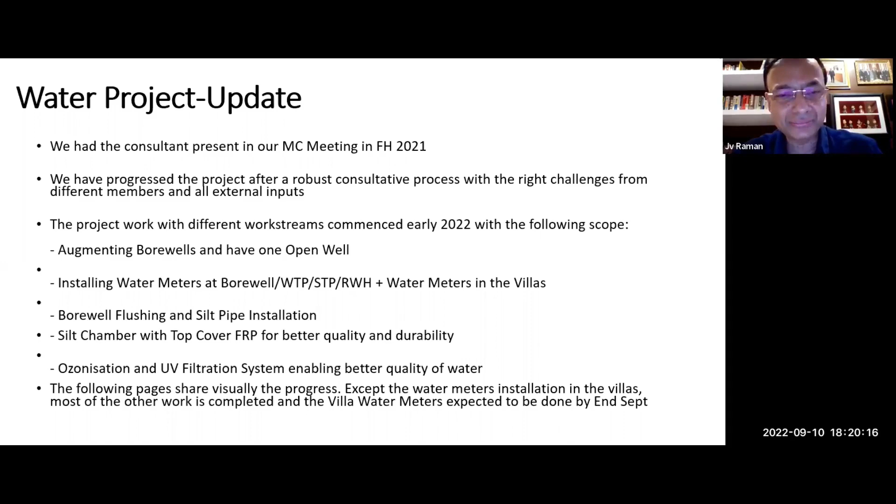The next chart. The first thing he mentioned is that North Karnataka is a water deficient table, the water table is pretty poor. We have 3 borewells dug below 1,000 feet, and he said there's no point going for a 4th well because there's also going to be legislation banning borewells in North Karnataka, or rather North Bangalore.

So given there's so little water, he suggested going into open well digging. We started off with one well, and remarkably at about 50 feet we got water. That's a remarkable thing we started off, we said let's experiment, there's no harm trying something out. Now we want to put in 2 more wells. I believe we'll get at least 8 to 10,000 liters. While it's still early days, we're working on how to improve supply to more like 8 to 10,000 liters from the open well. So this is the first thing we did on augmenting the supply.

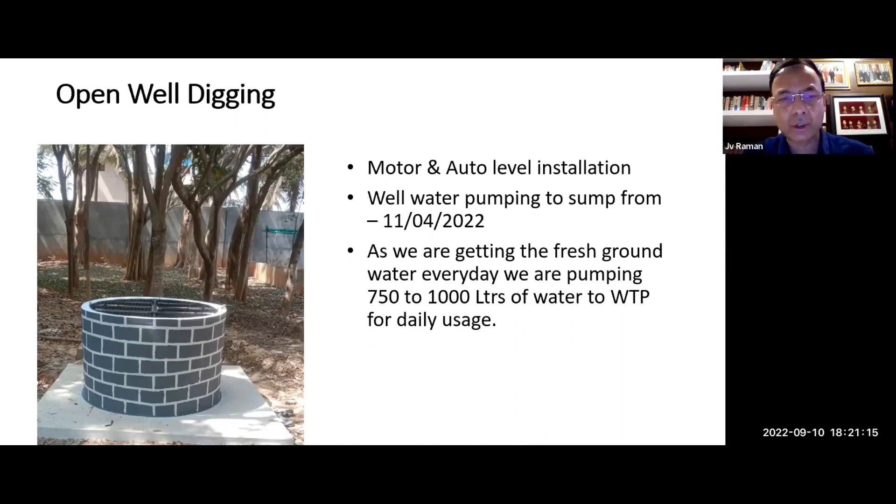The next chart. This is what we did with the V-wire injection well. I learned a lot talking to Vijay on this, because we have a borewell, and this was a new technology or system which enables better management of the groundwater, even during summer months, to manage the water table better. This V-wire injection has been done in the existing borewells, which is fantastic, because we're now able to consistently get close to 100,000 liters pumped out from each of these borewells. The real acid test will come during next year's summer, when we believe the water table will be augmented.

Now, thanks to the copious rains we've had this year, we've completely stopped using the borewells. I said let the water table continue to rise, and we don't touch that. We're using everything from the rainwater tank, because currently at the rate of water inlet we're getting, 1.5 crore liters gets filled up every 3 days, so there's no need to even touch the borewells. This has been done for all 3 borewells, with 3 injection wells created nearby the existing borewells. That's another thing we did to augment the supply.

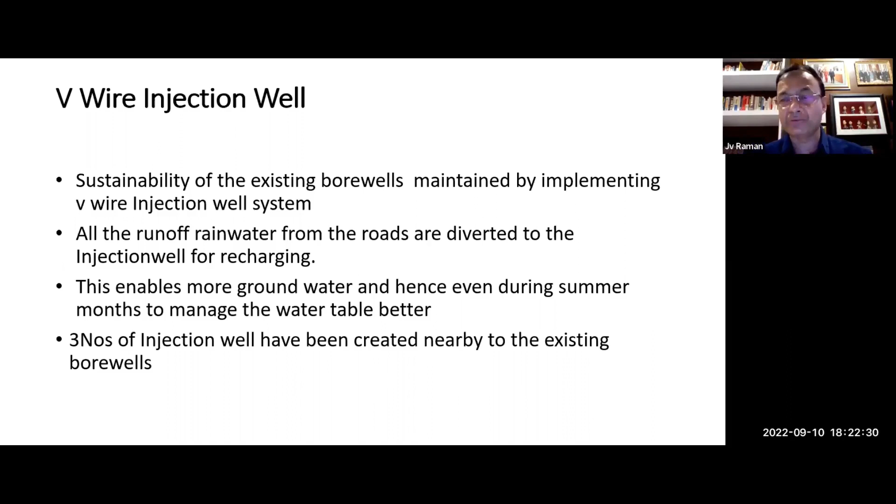The next chart. These are some of the pictures you can see. They worked around it to do it in a proper and nice manner, and completed the job, because it had to be finished in a way that doesn't spoil the topography of the land there. So these are some pictures. The next chart.

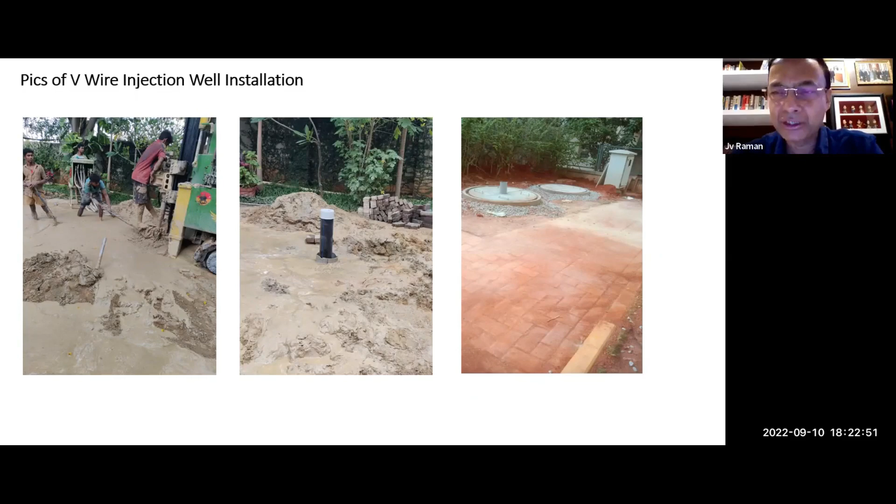This is the silt pipe installation to the bore well, one of the things done near Villa 31. We started off on the 25th of March this year on water pumping and rejuvenation of the existing bore well, which was not in use because the water table had gone down.

Thanks to this, we started using it again, which shows that the system works. People were very happy that a bore well which was not functional has been brought back to function. Next chart.

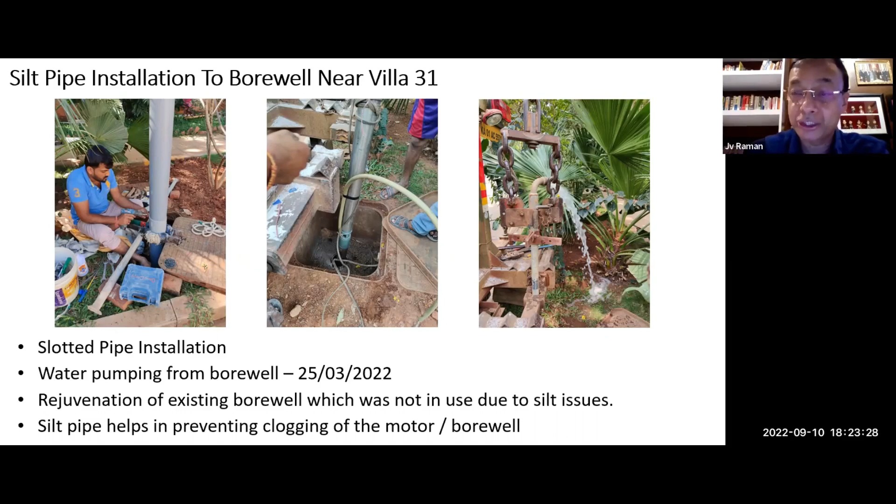This is what I mentioned about the silt chamber design. Because of the nature of the land here, with 17,000 trees planted, all more than 10 years old, there's a lot of leaves, particularly during the autumn time. So he studied the whole thing.

Two things were done. One, fiber reinforced plastic was placed as the top cover, which is going to be weatherproof for the coming decades. Two, to ensure that any silt or leaf formation does not go into the drainage system, he designed it so it does not get sucked in. That was the second recommendation from Vijay which was implemented.

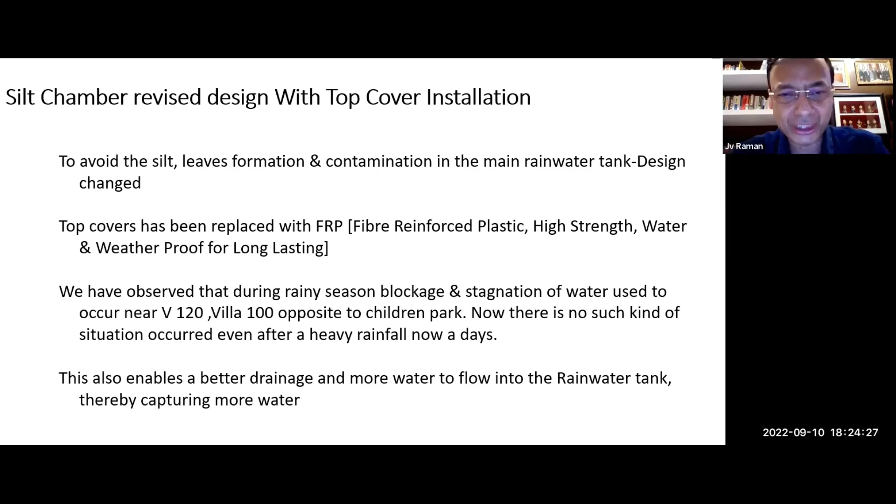The next chart shows some pictures. You can see the FRP and the existing silt chambers. We deepened them and took the pipe to the top, creating a siphoning effect, so that leaves, dust and debris settle, and only water rises and comes through. There was also a covering on the pipe.

We put a grating on the pipe. Earlier, because the rainwater harvesting tank is there, all the muck used to go and settle down in the tank, and cleaning that 1.5 crore liter tank is a big task. Even the capacity would come down.

So we thought cleaning these silt chambers would be easy instead, so anybody, the maintenance team, can clean it easily. We opened it up; earlier it was concreted at the bottom so water didn't percolate. We removed the bottom concrete and made it deeper, so it holds the silt, dust and debris at the bottom, which can be removed later, and the water rises and comes in. That's how it was redesigned to avoid silting up the main tank.

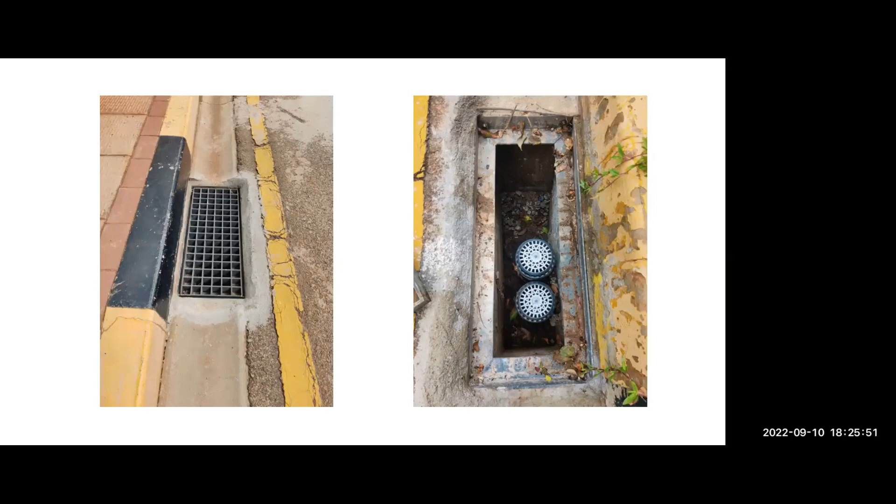We have trained the maintenance people, and during heavy rains, almost every second day they clean these silt chambers, so we can ensure nothing gets clogged. Next chart.

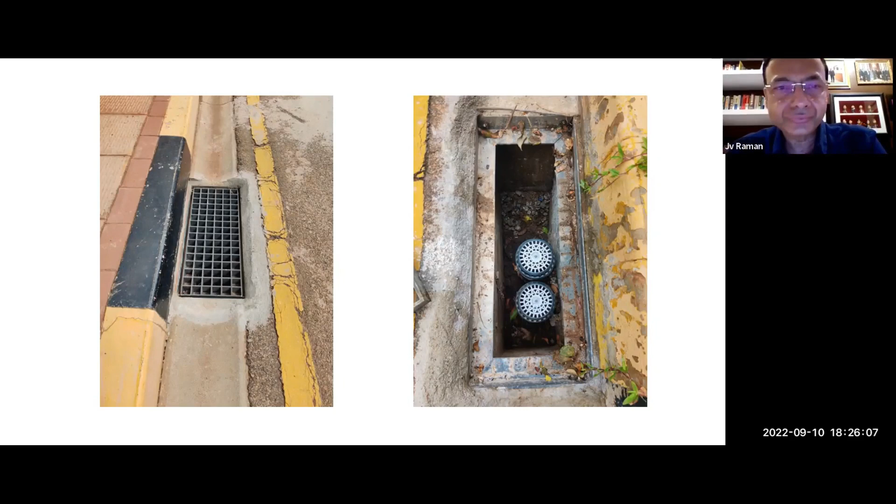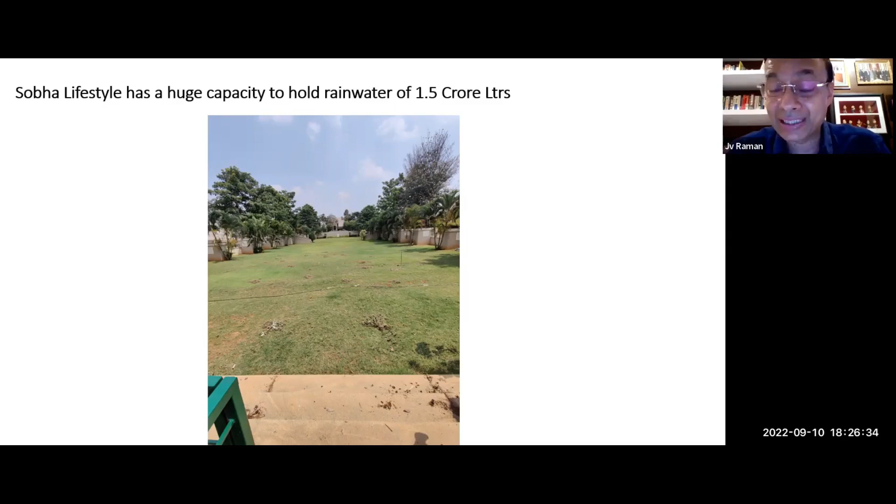This is the rainwater tank, 1.5 crore liters, like the size of a football field. Credit to Sobha for having conceived this in 2009 as an integral part of the complex. This is an enormously large capacity which helps us become self-sustaining as a community. Next chart.

Now we come to the augmentation part—how do we make people accountable for the water they consume. I'm a great believer in the laws of economics: if you don't pay for something, you don't value it. When Sobha installed the water meters, they didn't think it through carefully; they were analog meters with errors in consumption. When we tested it, it was giving readings about 30% higher.

When Murli came into the picture with digital meters, we found two things. First, we calibrated the digital meters against the existing analog meters and found the analog meters were overcharging by almost 25-30%, confirmed by installing both meters on the same pipe. Second, the problem with analog meters was that every month someone had to lift a heavy manhole-like cover, almost 50 kgs, and people just weren't doing it, so no charges were being applied and people weren't monitoring usage.

So we convinced the committee for everyone to invest in digital water meters, which they can now monitor via mobile phone or on the web, so they will know their water consumption.

As we said, we have agreed on the rate which will be charged per liter, similar to the rate we were using to buy water from outside. We think it's fair now that people start charging, because we found out that based on international consumption standards for a household of X people, with a lot of garden area, consumption should be X, but it was significantly over X. So we believe this will help control consumption when people start paying for the water they consume, from October 1st broadly.

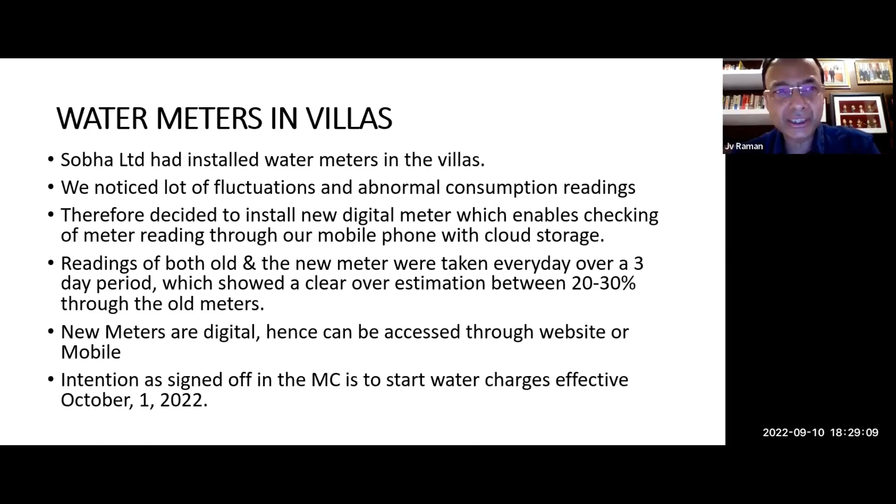Here are some pictures of the water meter. Murli and his team have been working passionately, and we also learned from the initial installation how to do it properly and cover it nicely. The finished product has come out pretty well, and looks very nice and elegant in individual villas, with a nice color chosen. This is now done for about 50 to 60 villas, and Murli is working hard to expedite it in the coming weeks to complete the majority by September.

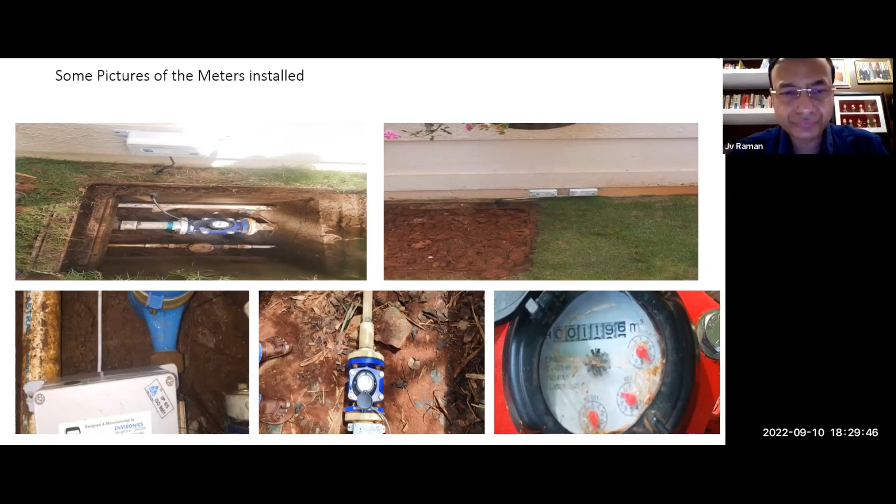This is what we said about the ozonization and UV treated water. This has been installed, and I'm talking to the converted on ozonization and UV. We are now seeing the benefits because we tested the water pre and post, and sent it across to all villa owners to give them confidence that this is being checked and monitored in terms of water quality readings, so they don't have to fear about the water coming into their villas.

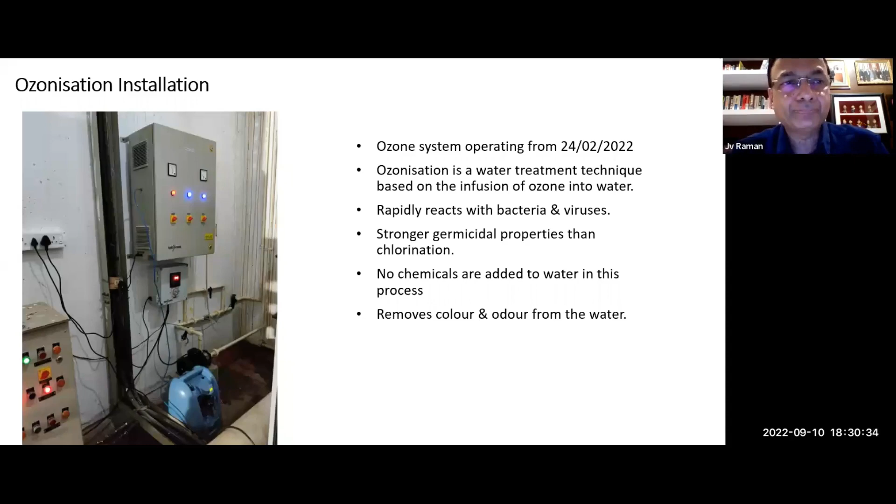This is the other thing we did to improve water quality. The next chart is the ultraviolet disinfection system, which is good because no chemicals are used for treatment. As I said, we've completely stopped purchasing water from July 1st. That's huge because we were spending almost 35 lakhs per annum; last year between July and December we spent 19 lakhs. This time we've stopped buying water from July 1st, and these contractors were pretty upset that we stopped buying from them. This will pay back for itself in a remarkably short period, it's a no-brainer beyond just the economics.

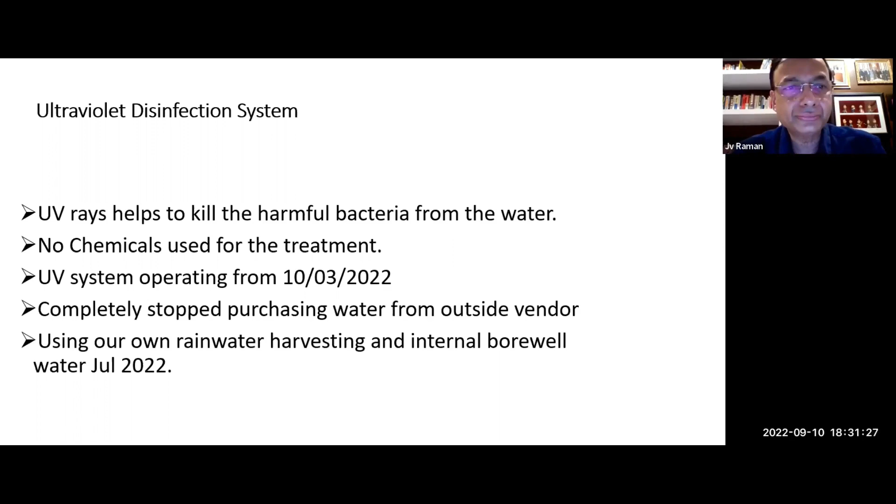But I think it's a phenomenal thing for the sustainability we are looking at. These are some pictures of the installation of the UV system which has been installed.

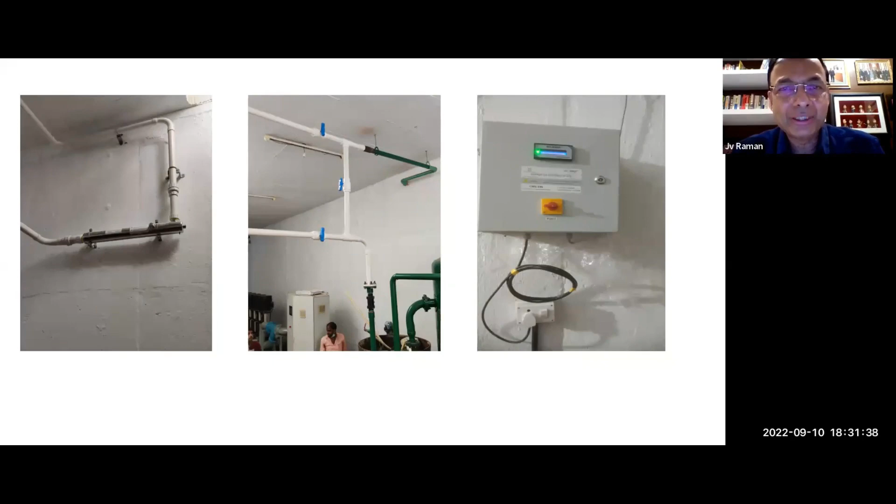Now, in terms of future plans, this is the last slide. We are quite encouraged with the open well and the type of water we have tapped into. We are looking at 2 more open wells to augment the water supply; even if we get 10,000 to 20,000 liters from these open wells, that will help. We also found that gardening uses the maximum water, because with 55 acres there is a massive amount of garden and not very dense construction, so there's a lot of open space with gardens. With sprinklers you can control the water dispensed, so as a second stage we're looking at advanced sprinklers with high pressure to minimize water consumption for gardening, which is the biggest chunk of water used.